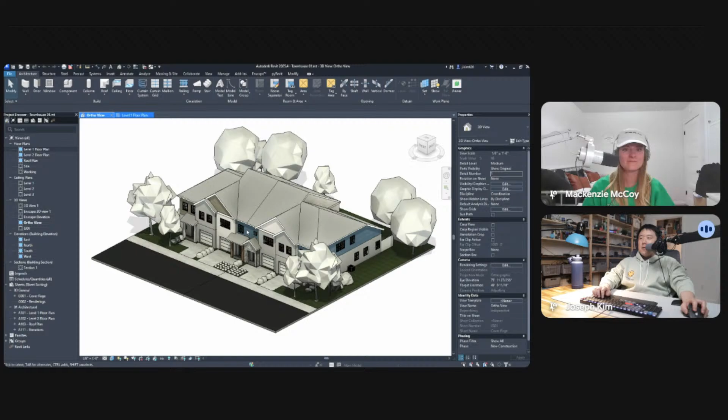So this is a representation of a simple residential townhouse model that I have put together. That's great. Yeah, this used to be my house, so I put it all together and came up with a more detailed plan. Often you want a living room like this, and mind you, these are Enscape assets, so they come in nicely. The Enscape library is a library that you can certainly use for placing these furnitures. But let's say you just don't have any of those available.

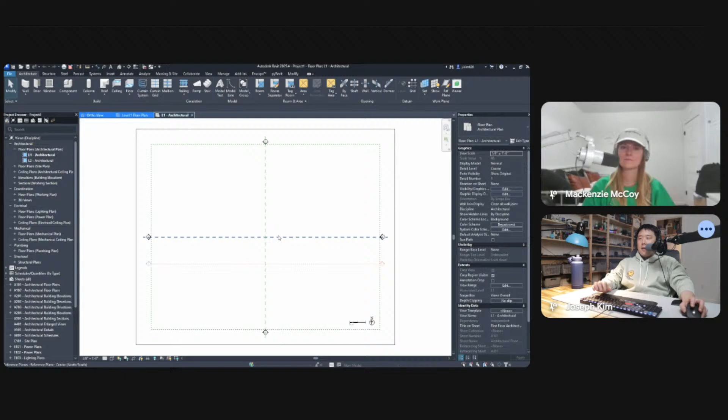You could find and use some assets like this off of the Autodesk families that come with it when you first start a project. So, for example, if you were to start a default project, it comes with some families in there. So here you can see, I believe for years they have had desks. Let me see. Yeah. They almost always have a toilet.

Yeah, it has some countertop. It has this default desk. How funny. Yeah, so you could put a desk, but inevitably you put in a desk that doesn't look like anything like what you intend it to be. So I don't know who uses this kind of desk anymore, but it's been years that the same type of desk, and also there are different kinds, and nobody's sure what's the difference between that one and that one.

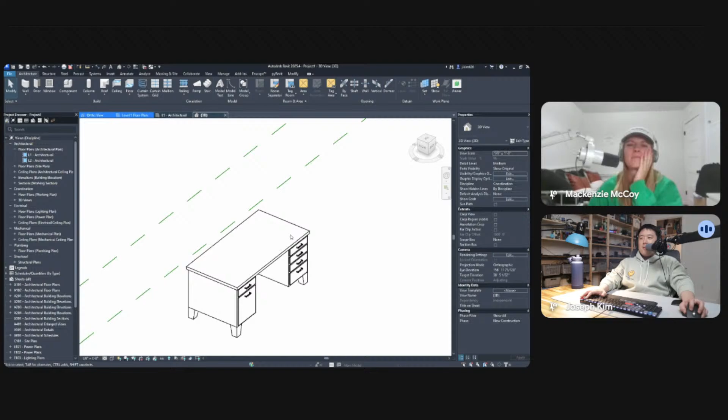I guess that's the size, but besides, what's the difference between this one versus this one? And there are some parametric data in there. Sometimes you can just look up the properties and see maybe the body, they look identical. So again, these are some of additional information that you don't need at all until you're really ironed out in terms of your specification and selection of your furnitures and such.

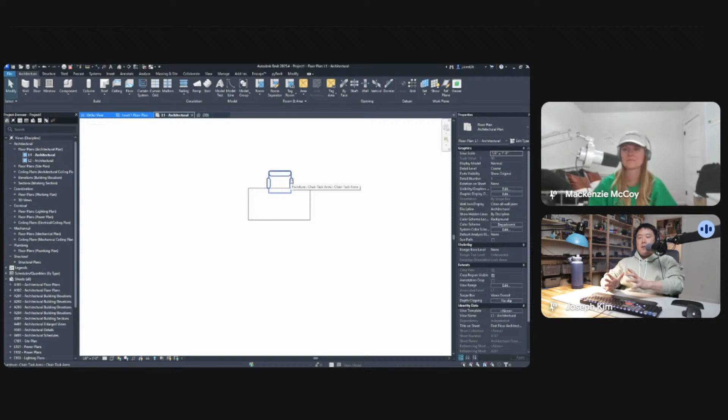And again, good luck finding other type of things that can go with it. There is a desk and a chair, I guess you can use for basic representation, but that's fine. But when you want to do living room table, dining table, or restaurant tables and chairs, those are not available as a default in Revit. Therefore, now you're going to have to go out on a hunt for finding something that is represented. Let's say we want a sofa.

Actually, maybe is there a sofa? No, no sofa. Chair. This armchair is all you get. So no restaurant chairs, no dining room chair kind of thing. Bar stools. So let's say I want a sofa here, and let's say I didn't have that, and also here's a countertop island that I put in, but I want dining table and chair set here.

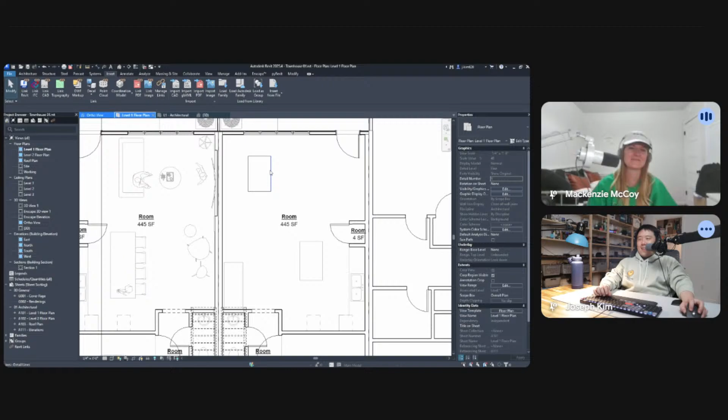Now I can go about finding a family that's somewhat like this, so that I can put it in there, or I'll go to a website like bimobjects.com or Revit City, those type of websites I can go and look for. Or I guess a lot of times what we end up doing is just putting a detail line, fill regions, and then now do a little nice thing and then group that so that I can repeat it somewhere.

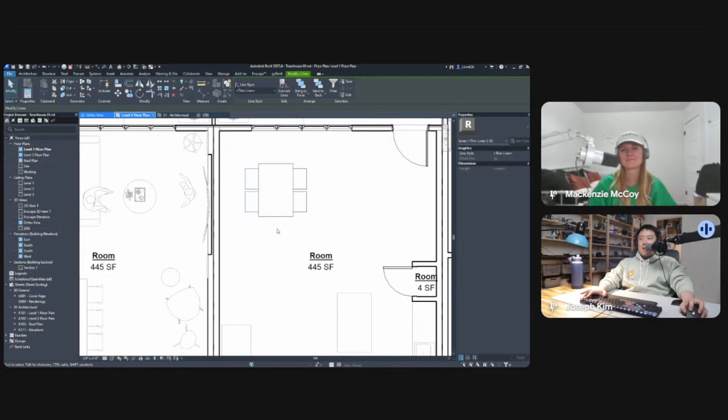And again, that's fine for that moment, but do you really want to? Yes, when time is at stake, you gotta do that kind of thing. And we've all been there and done that, and that's fine for sometimes. But sometimes you want to do a little more than this, or even for later rendering purposes, when you look at things in 3D, you want to make sure those are actually shown as some sort of a blob in your rendering. So bringing them into a 3D model would be somewhat useful too.

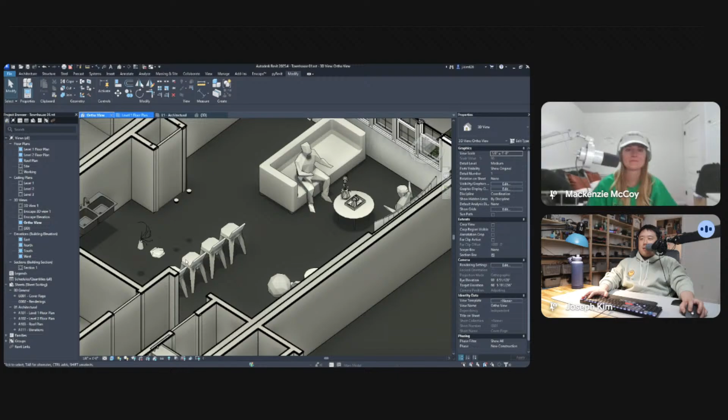So let me do a section box here, and then let me just show you what that looks like. Obviously, where I had placed, this is the second floor, so let me go further down in there. Ones that came from Enscape have somewhat of a representation. This countertop is gone, but the sofa and the person there is kind of there. But obviously, because I put detail lines, it's not there, and I won't be able to cut a section or elevation and expect that to show up on there. So, how do we kind of solve that problem?

As I have mentioned, we can go to the 3D Warehouse, 3dwarehouse.sketchup.com. You do not need a SketchUp license in order to utilize this. That's a good side, but you do need an account with SketchUp. You can make a free account, and you can still download. I think there might be some limitations in how many models you can download per given time. I'm not clear on where that limit is, but I've heard there may be a limit. I am a SketchUp license owner, I don't have that limit. So without research, I'm not able to tell you what is the limit.

But here we can go ahead and look for, let's say, sofa, for example. SketchUp does a pretty good job of presenting their verified type of content up here, and they do have a couple more parameters applied to them. So where they have these live tags, meaning they have variations, you can go ahead and configure that type of set to suit your needs. So you can tweak the height. That's cool. I don't know if this is all that necessary, but what I'm going for is a simple sofa set, or perhaps sectional armchair here, for example.

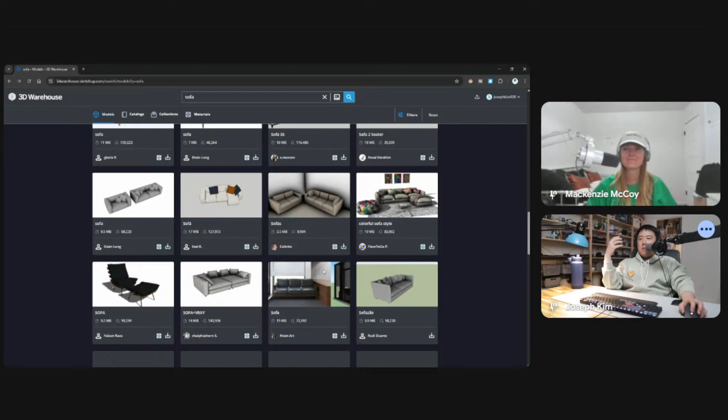But you can absolutely use other individual provided types of sofas or any furniture. There's just really a limitless amount of stuff here. You can search by popularity. Something that I do is I put a filter so that you limit things by file size as well, so that you don't end up importing something too heavy or an entire world, right, and something that is kind of simple enough.

Because honestly, for a sofa, 10 megabytes, do you really want all of that? Right? So you want something simple enough, a simple representation of what you're trying to do. Probably this type of thing will suffice. Even if it's a blobby thing, I would have accepted that too. Again, this is a very simplistic type of thing, very light. Those are the type of things that I would mainly look for. But often you can also go off of what SketchUp provides as kind of verified, or their own set of library, and download them.

A simplistic thing that you can do is, and it's kind of obvious that I haven't tried this and pre-run this ahead of time to verify which works the best. But you know, let me just be consistent and try to download something that somebody else could also download as well. So let me go ahead and pull this one up. And I don't have to edit this because, again, I can configure as I would like, because this is a live model, which you can just change a few things to make sure it's the size or type of sofa that you need.

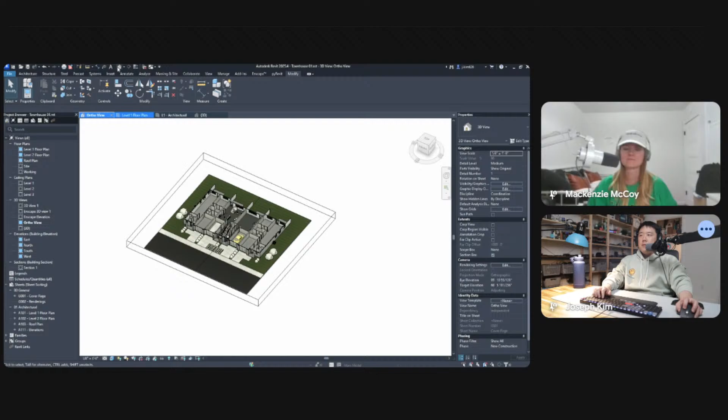But for the most simplistic type of workflow, we tested this last time when we were working with the Revit workflow, right? So when we were looking at this, how do we import? We went to Insert, and we learned that we can link CAD, just trying to refresh your memory here. So you can go ahead and pick the SketchUp file, and because of this version removal, going back to what we spoke about last week or the week before, you don't need to worry about versioning of SketchUp anymore. So you can either import CAD or link CAD. My preference is link CAD so that you can always go back and update.

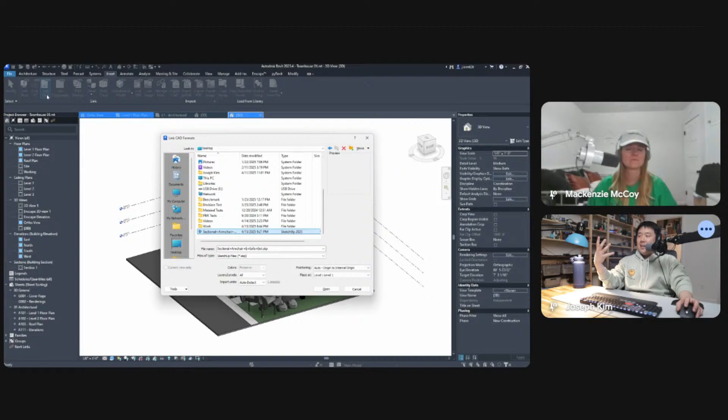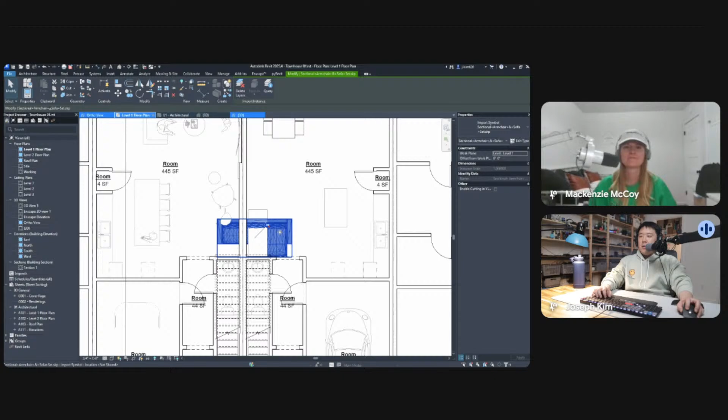That was the workflow that I have shown. So let's go ahead and link, and then I have opened it, and hopefully it showed up somewhere. Maybe it showed up somewhere in the middle of the plan. It did. Do you see it? Right by the stairs. Yep. So it came in, it's pinned, so I have to unpin it and move it around. So that sofa did come in.

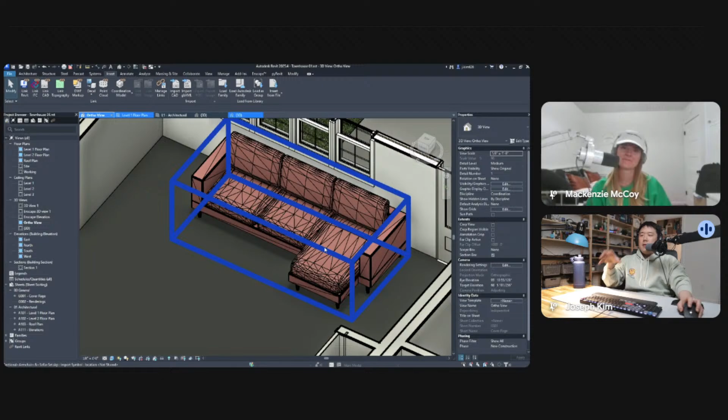Maybe let's put it there. So in the 3D ortho view that I had, it has come in even with the color, not necessarily the flowery texture on it, but it's still red. And the biggest downside when you bring things off of SketchUp, especially for some of these rounded things — for tables and chairs not as much, but for something like a sofa that is blobby, not rectangular, cushions — it may have triangulation or faceted faces going on. So those are the things to watch out for.

It's not as detrimental if you have one diagonal line going on, but on your plan this is not so pretty. There are a few ways to get around this, because you don't want to have linked CAD all over your model for all of these entourages that you intend to bring in. So instead of bringing it in as a linked CAD — I just did it for the purpose of demonstration here — I'm going to undo to where I didn't import that bit.

And then I'm going to start a new family, not a project. So family here, and here's my family browser. Because I'm in the United States, Imperial is what I'm going to use. For something like furniture, you can use furniture. My general preference is to use generic model because it is more widely accepted. It makes almost no difference, but generic model is a bit more flexible in that you have these pre-made templates that are face based, floor based, whereas furniture doesn't have that.

So try a few things out. My general recommendation is to use generic model so that you can always reference it later on, because then you can apply this concept to various types of things. For a lighting fixture like a chandelier or pendant light that you download off of 3D Warehouse, you probably want to put it in lighting fixture. So depending on what it is, you may want to put it in a different category, but generic model generally fits the purpose. So I'm going to go with the generic model without a specific host.

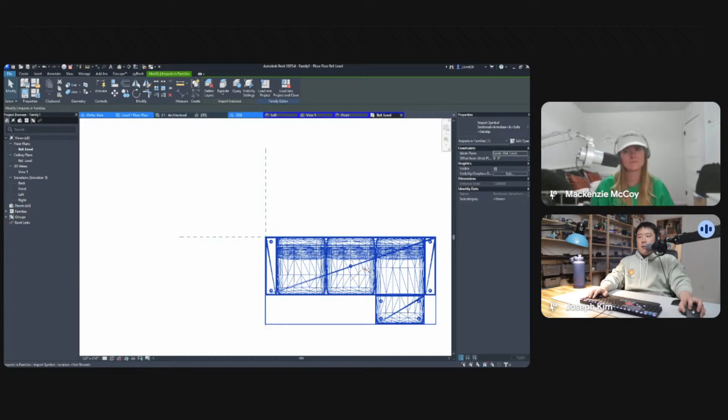So here I can go ahead and insert. Notice how there is no link CAD. This is just a Revit family thing; if you know Revit family making, you know this. You cannot link CAD into your family, you can only import. So let's import this. Once you bring it in, there's no link to the file, which doesn't matter because we're going to work off of Revit anyway. You find it and bring it in, and the origin for this family was in that corner, and it's going to be pinned. So we just have to move it to a spot that is more representative of what it's supposed to be.

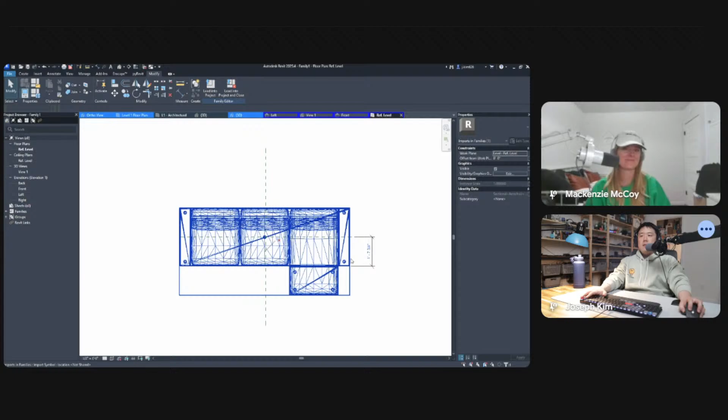You can actually put parameters on this because some model elements can be measured. Once you put a dimension, you can turn it into a parameter. For example, if you had multiple table and chair sets made as one family, you can have chairs at different distances, or for a wall hosted element like a TV, you can offset it a certain distance off the wall, or for a pendant light, you can control how far it comes down from the ceiling. There are additional parameters you can add because this 3D model object is referenceable. But right now we're just trying to find an easy way to put a representative model into Revit.

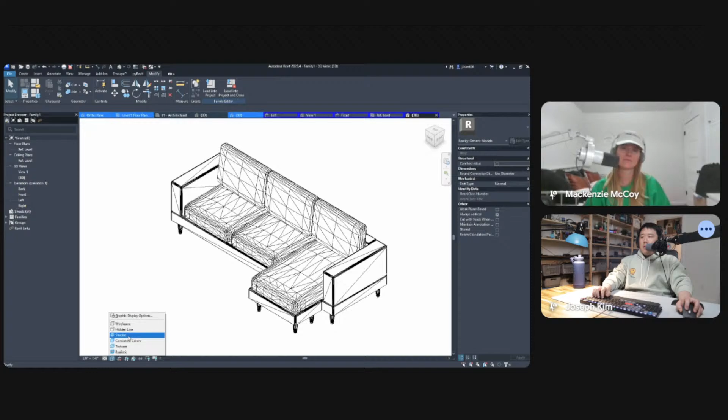So again, this shows up on 3D view. And if you don't show the inner lines inside the Revit project, those triangulations will not show up. But for plan purposes, you really don't want to show those types of things. So you can go here and not make it visible for your plan view, or change the visibility graphics so that it doesn't show up on your plan, and instead use a detail line on top of this, so that on your plan view it just has a rectangular representation.

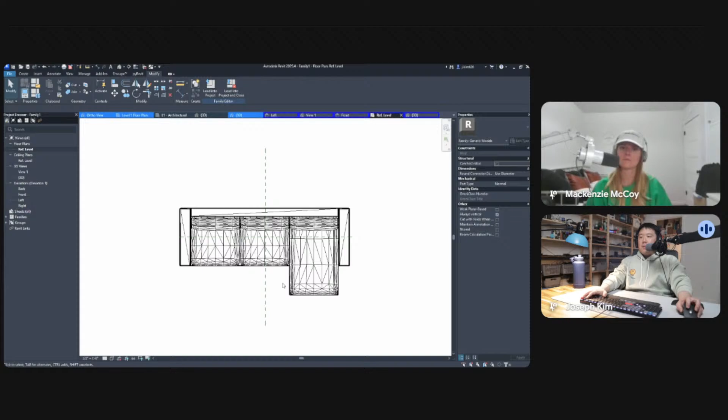So I can go ahead and create, then model line, and trace this out if I really wanted to make it look cleaner. And since it's sectional, let me go ahead and — what did I just do here? Model line there, and then create.

It's not accepting my shortcuts because I normally don't draw on Revit 2025, so my muscle memory is fighting against it.

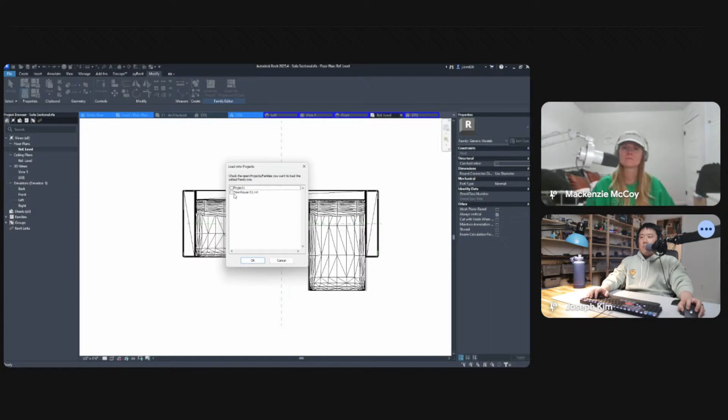So I have added the detail line in here. Now we just need to save this out. Let's save as family, and a dialog showed up here. Desktop, we're just going to call it sofa sectional. Perfect, and then save. Since we saved it, we can just put that into our main project there, and now it has shown up here.

So on plan view, it doesn't show triangulation because we masked it with a detail line. Slightly better than what we did previously. And then also on 3D view, this one, it doesn't show up because I made it not visible on the model part.

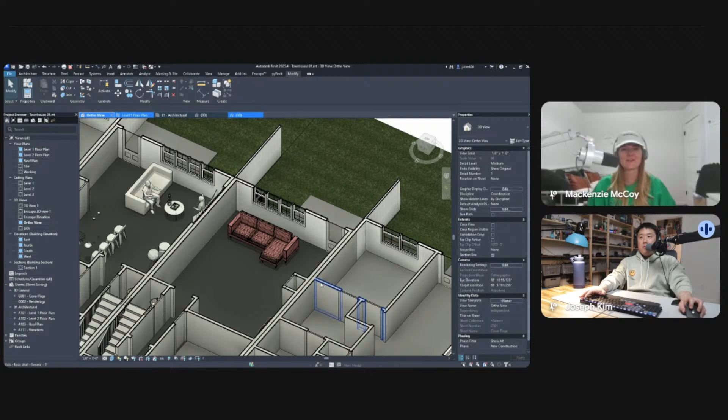So let's go ahead and edit the family, make sure this is visible, and then I'm just going to save it over, just like any other family that you use on Revit. Now it shows up on 3D, and then it shows up correctly on the plan view.

It will show up with triangulation on the side view, but you can also control that by double clicking in, and then you can control how it shows up on your front view or left view, that sort of thing, so it controls how they show up on section or elevation. So that way things are controlled.

If you want to be real fancy, you can have multiple SketchUp models in here so that certain things are turned on and off depending on the parameters that you put in. So it's really limitless, but you already have a good 3D representation of what you're trying to achieve.

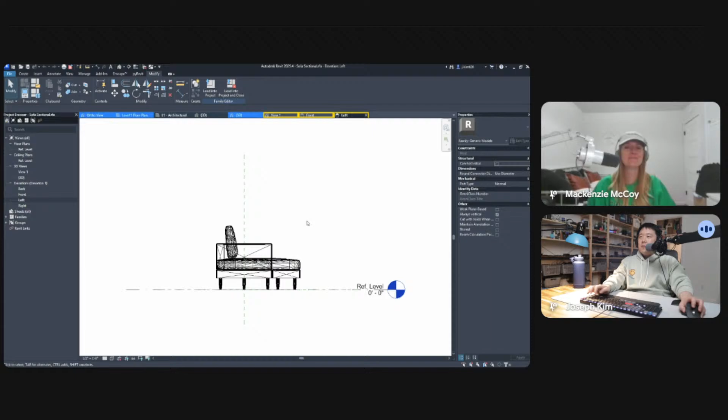Sofa might not have been the best example, again, because of the blobbiness of what it is. Let's go ahead and look for something simpler to use, like tables and chairs as an example. This was a good example though of seeing some of the difficulties on those cushions and how it can be tough to look at for a while or kind of heavy on the screen. Realistically, those are the challenges that you're going to face.

I'm going to mention this further later on because this can also be configured. So configurable ones tend to have higher storage count or the memory that it takes. Whereas this one is supposed to be really simple, right?

So let me go ahead and first download this, for example a dining chair. And then we're going to do, let's say, a table. Is there a dining set? Maybe a dining table, dining chair.

So you can configure it to multiple different kinds. I wonder if you can just configure the amount of chair count you need, like you have 4 chairs. I've actually never done this, so it's kind of cool. Let's see, what are the parameters? Height, can I set the amount of chairs? Yeah, number of chairs along width. Okay, I want 2.

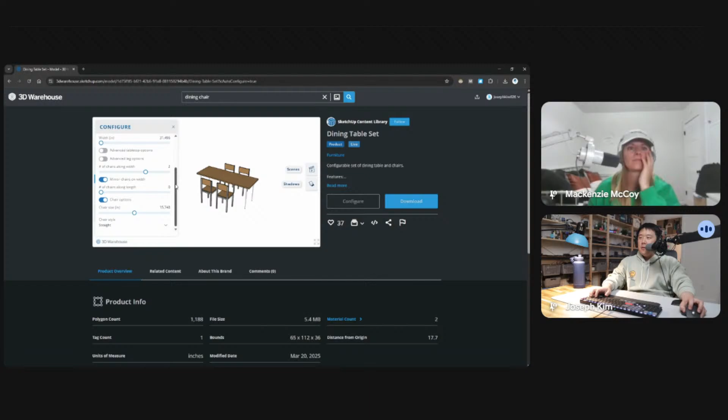And so then you change the table width afterwards, along the length I want... can I do that? Oh cool, yep, and then I can change the length, shorten it.

Okay, here's like a typical restaurant table and chair set, right? So I configured it, I'm going to download it. Dining table set, okay, good place to start.

All right, so we're going to go to the Revit side, forget this sofa set we made, I'm going to close that. I'm going to start a new family. For the sake of argument, why don't we do it off of furniture? I think furniture will be the most appropriate thing to use.

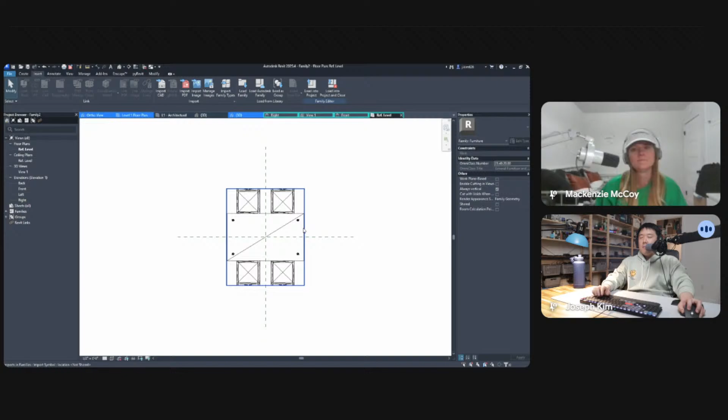Was this the one? Dining table set? Okay, so here, much less triangulation, but triangulation is still happening, and I'm going to touch on that a little later. But I really like the fact that it came in using the same origin so that we can just place it in the center.

And again, if you really want, on the floor plan view you can just mask it with a rectangle and turn this off on the plan and all of these views so that it doesn't show up incorrectly on your view. And again, you can also control it by detail level, which is kind of a benefit. So for coarse level, you just show the detail lines only, and then on medium or fine, you actually show the model so that you control that sort of visibility on your model, and you can filter that on your project side as well.

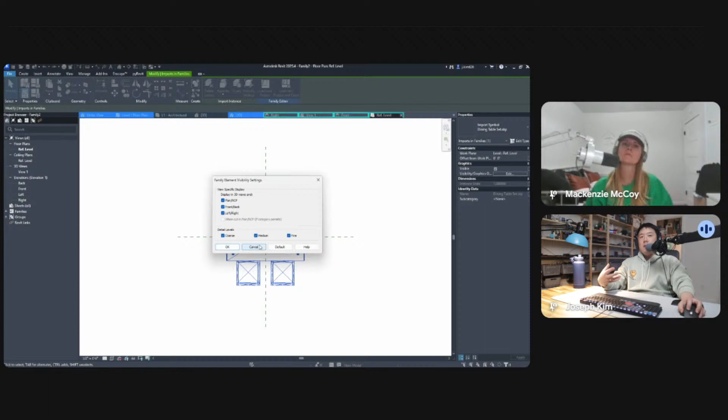That's cool, the details of control it gives you, since you're in the Revit family realm. But for this purpose, let's go ahead and save, though I don't want to get this family away, so I'm just trying to save this out.

Let's save as family, and I'm just going to call it dining table set. Save. All right, let's put it into the townhome project. Now it brings it in great, just like that. I didn't have to look hard.

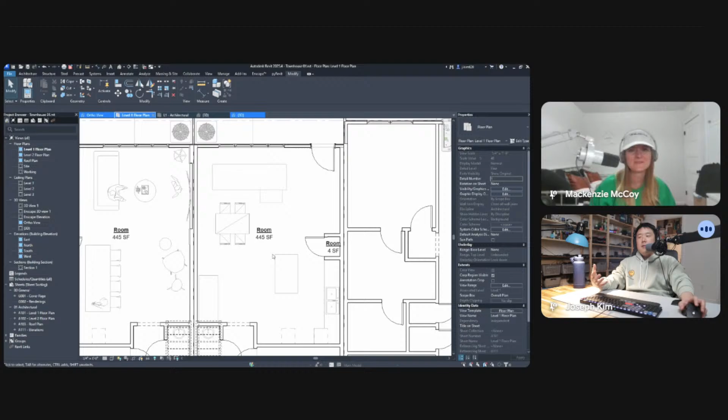And it didn't have all the unnecessary information, like a website link or model name. That's all going to schedule into my schedule that I'm going to put in, no other junk, just a clean thing that came up. Again, you can go into the family and clean things up.

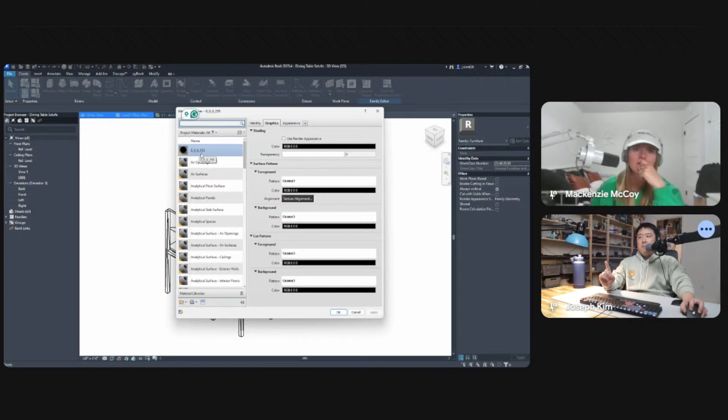So in the object styles—sorry, I mean the materials dialog—there are some additional materials that came in because this is a third-party material that's coming in. You can purge those things and they will go away.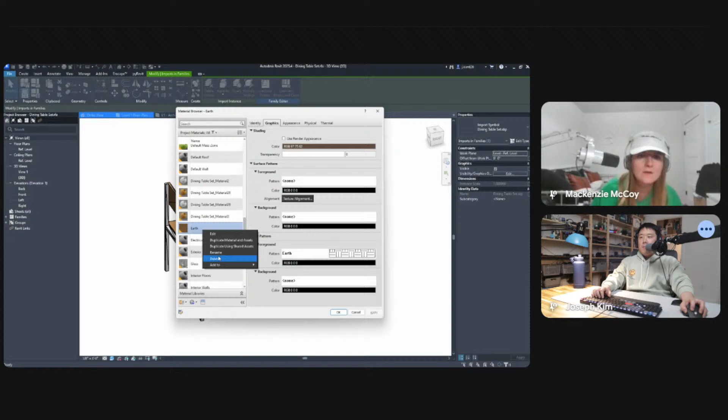For example, if this was a shaded thing, that brown color is showing up from the model you've imported. Let's actually find which one that is. It might have been like the earth—earth feels a little weird. Dining table material, there it is. I could clean that up if I really wanted to, so it doesn't show up on your model.

So a bit further purging or tweaking is possible just on the Revit side, because notice I haven't opened up SketchUp at all—I didn't need a license for it. If you just need entourage or furniture, you can use this workflow.

Before I move on too far, I also wanted to check the visibility graphics. It's already in there, so let's go to the ortho view. And why is that table not showing up on my ortho view? Do you have any idea?

Did you turn it off? In here? No, or is my furniture off? Yes. Yeah.

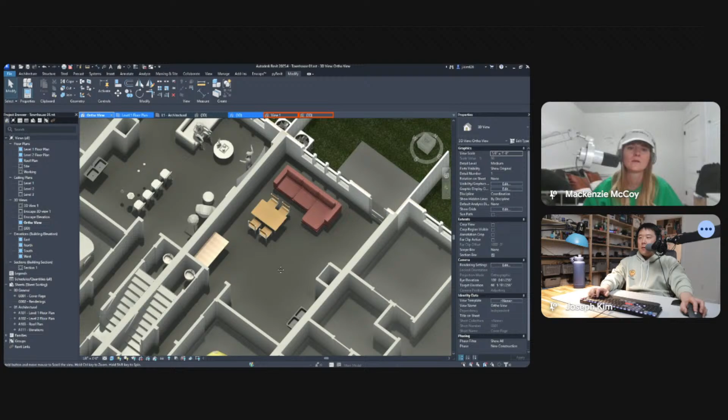Okay, so that furniture is showing up. But if you're bothered by this triangulation line, I believe you can turn off Show Edges, and then that triangulation could go away on your 3D view. Again, I kind of like seeing the edges—I'm kind of a stickler for that, you've heard me say it before, so I wouldn't want to remove it.

But if you just need to get things done and needed some representation, it was really simple to do this, whereas it would have been a lot harder to find something from other websites, or you do have Load Autodesk Family—have you used this before? No, I have not, I don't think so.

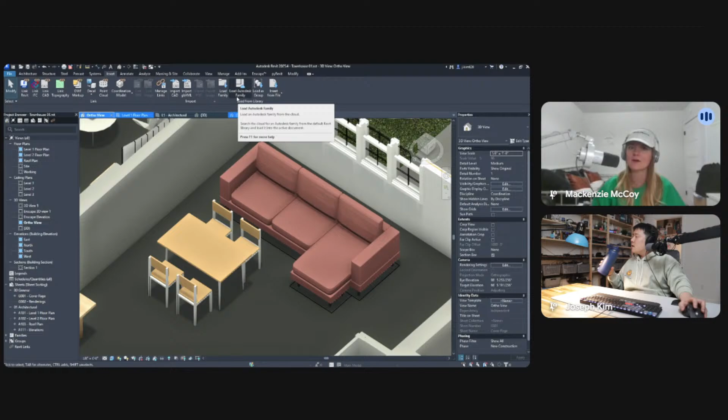Although this isn't the perfect library, sometimes you can find things in here that are okay to use. I have no idea why this is all going wonky—chair. Oh, not a lot of chairs, but you could use some of this. They're relatively clean and don't have manufacturer junk or too many extra parameters. But 'elliptical chair' is cracking me up.

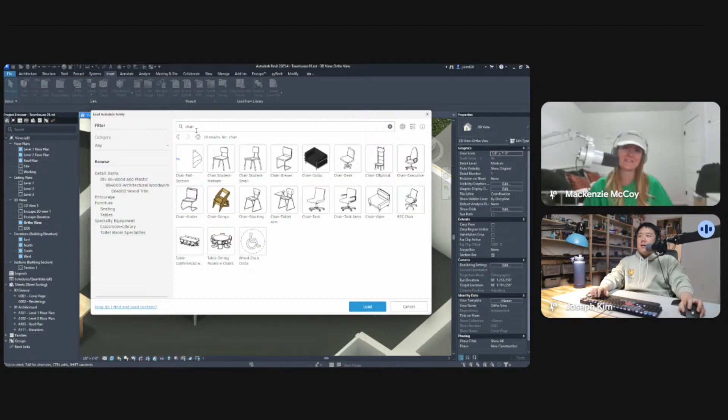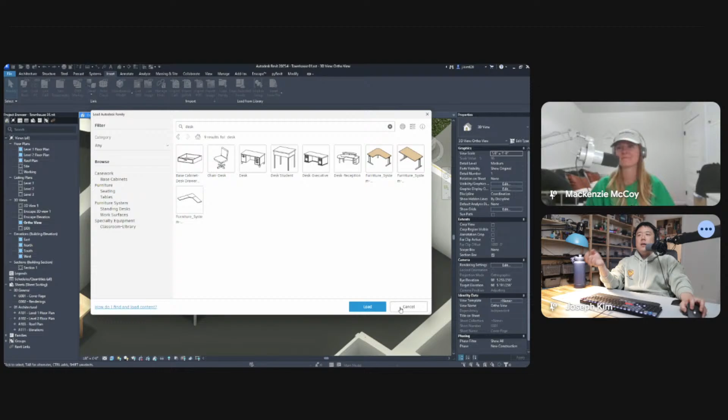Yeah, but they have a limited selection, let's put it that way. And desk—you could use this, and the desk you were finding was a variant in here. Sometimes those may just be good enough, but things are a bit more available on the 3D Warehouse side, and they may look just as good on your 3D views. So that's what I wanted to say.

Now, if you own a SketchUp license and can open that up, even as a web version, there are a few more things you can do on top of what we were able to achieve relatively quickly. So let's go back in here first of all.

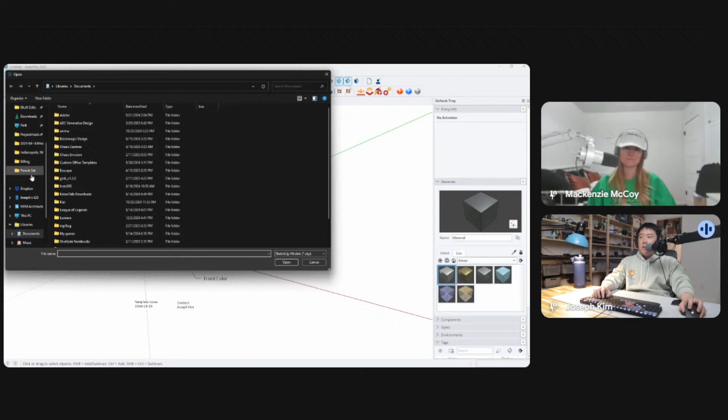Since this is all imported, we have to re-import after we've edited on the SketchUp side. Let's go ahead and open up my SketchUp, and I'm just going to open up that model that we had saved—here, I'm just going to open up this one.

One thing I do want to mention is, why are we seeing—this is a question to you—why are we seeing triangulation here when you don't see triangulation there? What would be your first guess?

Sorry for putting you on the spot, but I want other people to think about it a little bit too. No, and that was you clicked it, and I was like, wait, where's the line?

Yeah, because this one is not blobby, right? So far I get it. But this one, no, why? Yeah, because the only thing I see are the legs that are rounded. Is there an issue with the face that we're not seeing? Is it underneath or something like that?

So I just unhid all the hidden lines. Why do the hidden lines have a little triangle? Because this is the configurable live model, it needs to be able to stretch. So I think SketchUp is putting the triangles on.

So that means if you were to go find something really, really simple from other people that's not configurable or a live SketchUp model, that are configurable, you should not see that type of triangulation. For example, I'm going to guess that this is not going to have triangulation because it's a really simplistic thing that is not blobby. Again, we could change this.

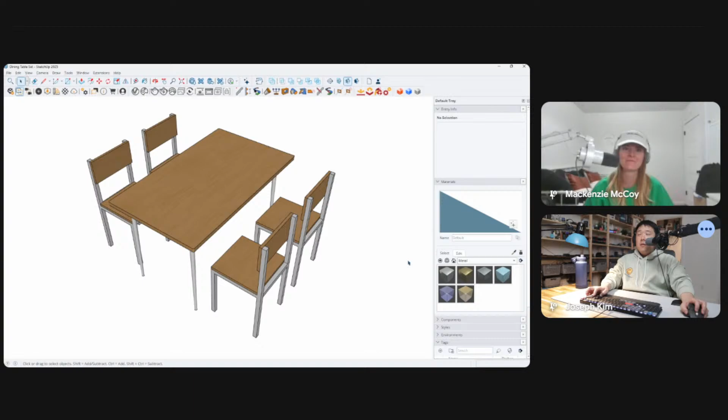So we've done a bunch of extensions, SketchUp tips and tricks. I probably did mention, I can't recall whether I did or not, but under cleanup, there is merge faces. I have the shortcut of Shift W if you follow along on some of the shows I have done before.

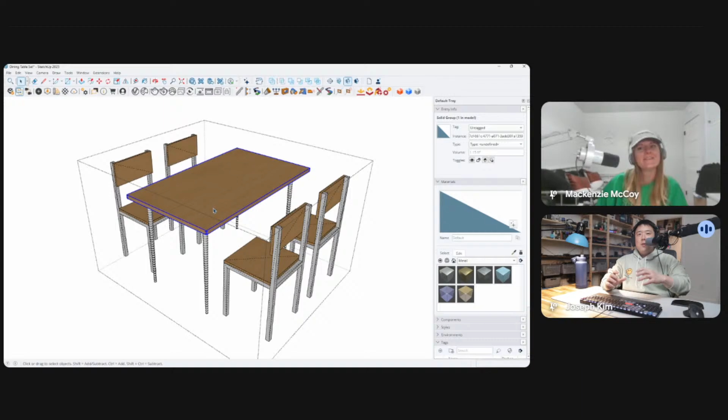If you do merge faces, and I'm going to do this in quick succession, I'm going to select this bit, the top panel of this, and then do cleanup. I would use the shortcut, but for visual representation I'm just clicking it. And you see how that triangle just went away? So wherever it's possible to merge the face and remove the triangle, it is going to do that.

I'm going to do that from outside and then run the same thing, which is Shift W on my custom shortcut. If I do that, it just simply wipes it away. And also I'm going to run a purge tool, which is Shift 0 on my custom shortcut, and get rid of any other materials or things that I am not currently using.

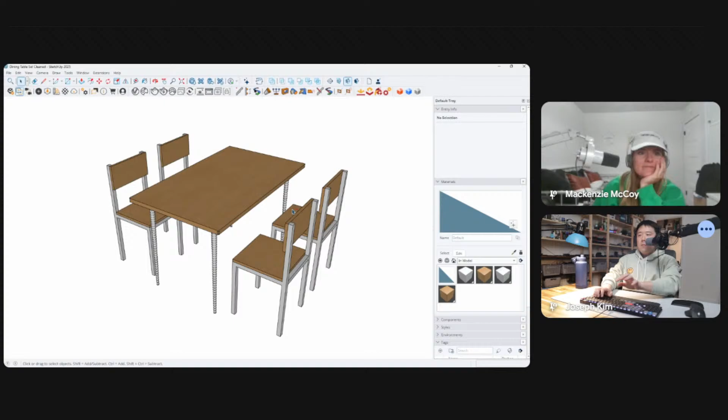So here are simple four materials that are coming in here, and that's all I have. From here, let's see if it reduces the file size. Okay, so this is cleaned. Let's see what it says on the size. So this one is cleaned.

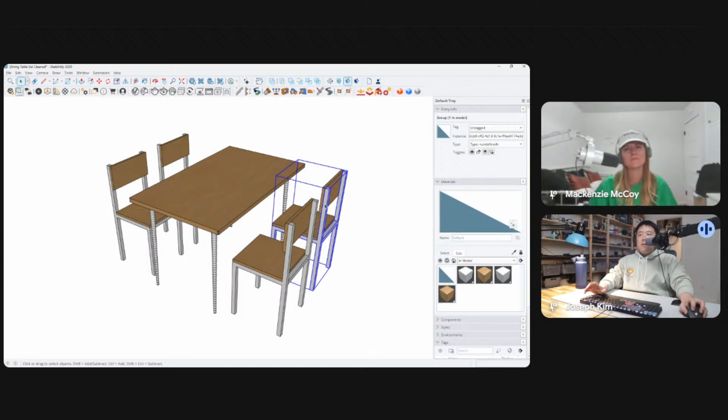Still 5 meg. I'm not sure why that is so high. My guess is that because this is a live component, there are some aspects to this that are adding on to the component count. So that's something for me to figure out later on. But yeah, my guess is that if this was not the live component, then it should have been a lot less than what we got, because it really isn't much geometry here.

I wonder, though, if I were to start a new file and put this in here, if that's going to be that high again. And I'm going to try to use the same origin. Here's a little tip: hit K once if you can't see the origin, and then go here, and it'll just snap right there.

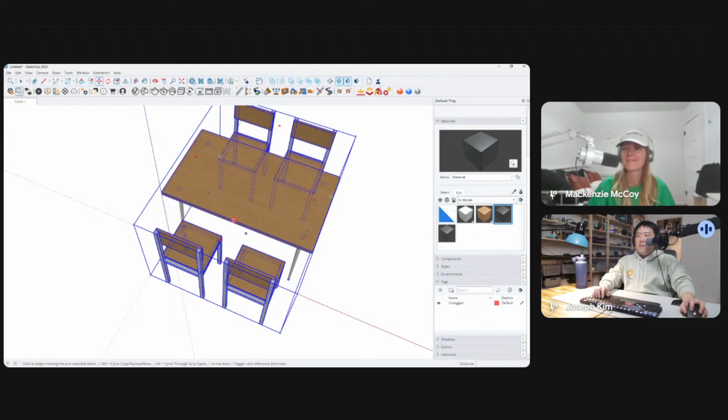Just picking up SketchUp tricks on what was meant to be a Revit session. Here, so that one there, I don't know what I just did there.

Here, and then because I have K enabled, I can snap on that origin. So everything is arranged and centered, and then I'm going to save this over. So I did save as, which is Control Shift S, custom shortcut. My muscle memory. And then let's see how big that is.

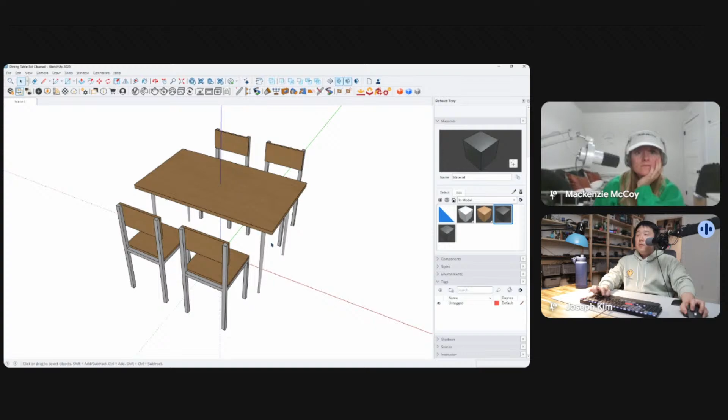Had I closed it? All right, desktop for you. Still 3 megs, but that went smaller, that went down. Not sure where though. I wonder if it's a material that is really big. The image sometimes can be kind of big.

That would make sense. How about this one, does it have mapping on it? No, it doesn't. Okay, we only got two materials.

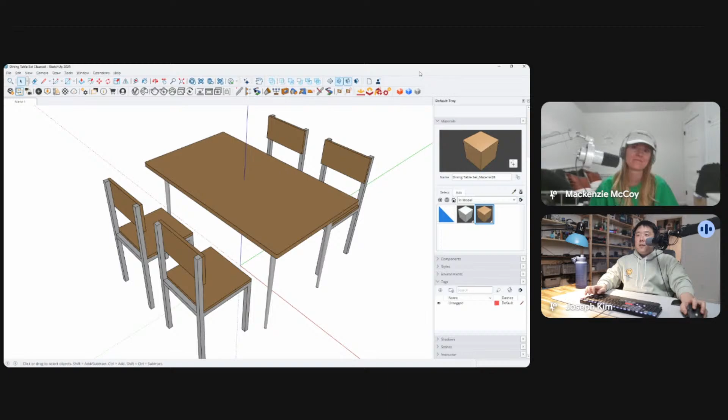Purge once more and save over it. And would that be big? Oh, it's smaller. All right, 2 meg. We were able to get it down. You did. Yeah, nicely done. So maybe I can study further how to bring that down even further and strip it out. But that's how much we were able to get down to.

And then let's go back to the Revit side and replace this guy. Yep. Delete it after unpinning it. And then insert. We're going to import the desktop side.

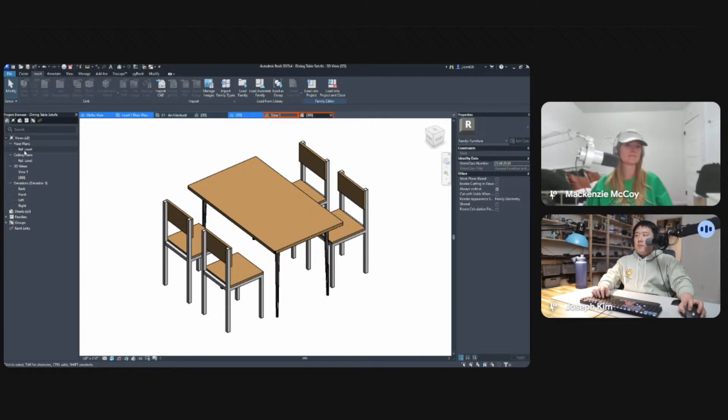Clean. So we brought this in the exact same spot as we intended. Maybe we need to clean this bit up, or, I'm wondering, is that gonna show up? No, it's not gonna show. So that is a good representation. It's pretty clean. Anyone can tell this is a chair, and anyone can tell this is sort of the table set.

And then I just need to update that on my file. I don't need to save over it, but it is going to replace. And you can see how it just cleaned everything up there. Yeah, that's so nice. And then let's do a little section there to kind of show off, right? View section, and we're gonna do a little section in here. We need to flip it. So flip it over.

Oh, no, that's not how you do it. At the top. At the top, sorry. Yep. No, you're good. Yeah, little brain freeze right there. Uh-huh. Things that you do all the time that just all of a sudden you can't remember.

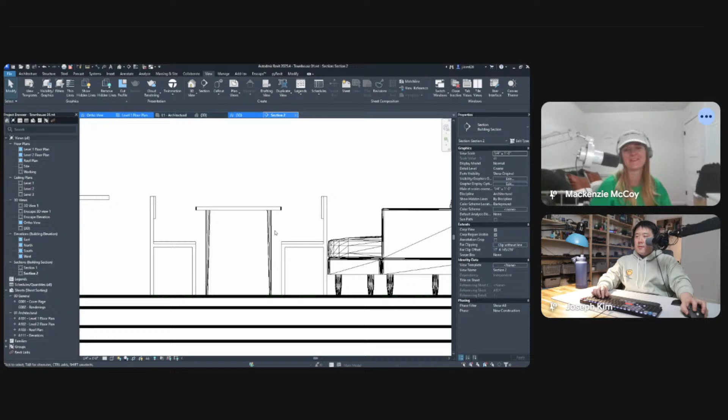Yeah, so here again the legs were somewhat rounded, but at least the other bits are exactly as they should be. That's great. And again, because these are generally snapped onto surfaces and reference planes, it is going to be able to do that. And then as default, the furnitures have the elevation from level parameter. So if you have a mezzanine or a little step over your floor, then you can type in some number, and it should be able to go up and down. So these are default parameters that you are able to use because everything came in as a native Revit element.

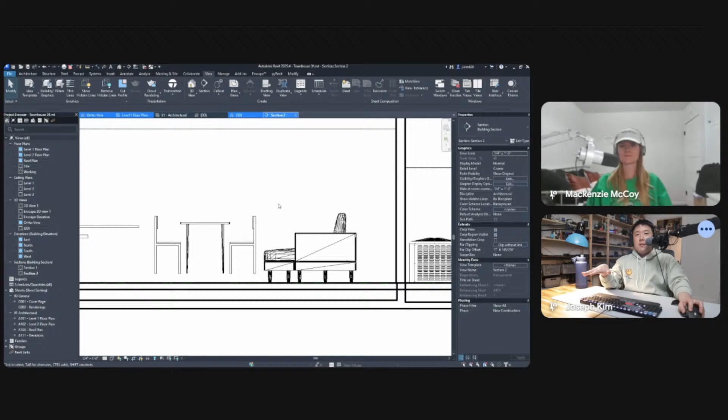So in renderings, it'll show up correctly because it has this. Again, it's not going to have reflection, no fancy material, but in 3D representation, you are going to be able to do this. And so another beauty of this, let's do lighting. I think that's something that I struggle a lot with in a lot of Revit models, finding lighting. Yeah. It's tough. Do you want to do sconce or pendant? Which one do you struggle the most with? I would say pendant. Okay, pendant. So let's do it. Yeah, because I think the varying heights that it could be, and the light source.

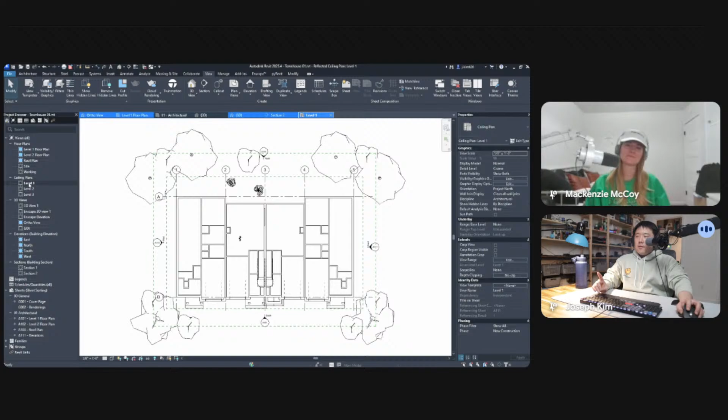All right, yeah. I actually did a pendant light import session way before. I made a video about this on my channel way before, when this versioning still existed. So you had to back save and do all of these jumps to do that. But at one point, this was SketchUp brought-in light. So I actually brought this in and did a pendant here. And I configured this one. This bit is from SketchUp, and I modeled something on top of this as a lighting fixture.

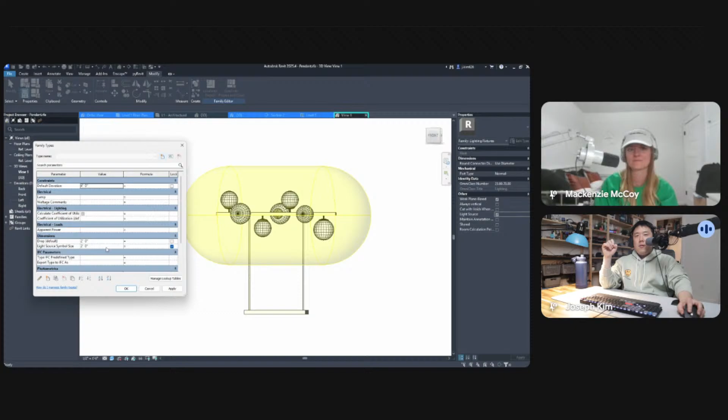That's brilliant, actually. Something important here is you want to have a light source for your rendering purposes. So seeing and being able to locate a lighting source based on the family is really, really important so that your rendering shows up correctly. And that is all possible. And I even added the parameters so that you have this drop length that goes on it.

For some of you out there, lighting sources, especially pendants, it's better to model them face hosted rather than ceiling hosted, because you will run into cases where you don't have ceilings and you're trying to hang it off of a floor or a roof or something like that that is not a ceiling. So you're 100% better off hosting off of just a face or a level or a reference plane. I learned it the hard way. Anyways, that's why the whole thing is upside down.

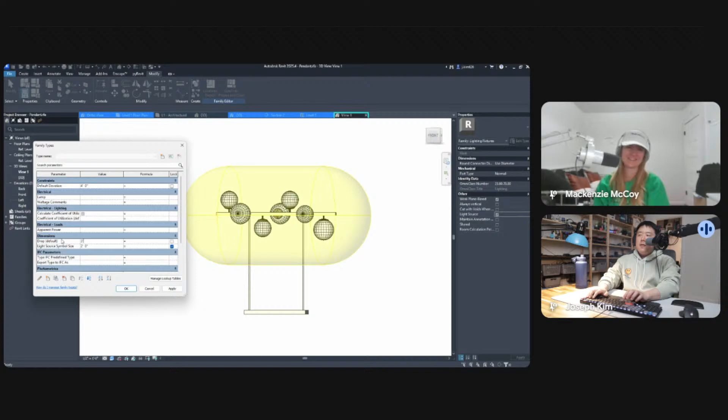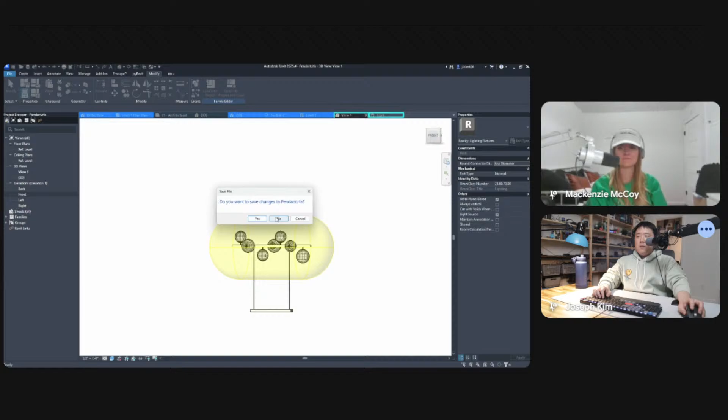Anyways, you can set different drop lengths, and then that will change accordingly. Unfortunately, I did not set this one correctly, so that it is also changing the lighting source along with it, but I can lock it. So once I lock that, let's go back to this view here. So as I change the parameter here back to 2 feet, it's gonna drop less. Sorry, it's upside down, but it will hit the lighting source in the correct spot. So I can bring that back into my project, and then it will have the lighting instance shown in there.

That's awesome. Lighting fixture, and then lighting source. If I were to show that, it's gonna be in there so that it is able to render away. Now, how did I do that? So I'm not gonna go into the details of the drop length and all of that, but I just wanted to demonstrate the fact that you can actually assign parameters to it that are workable, such as drop

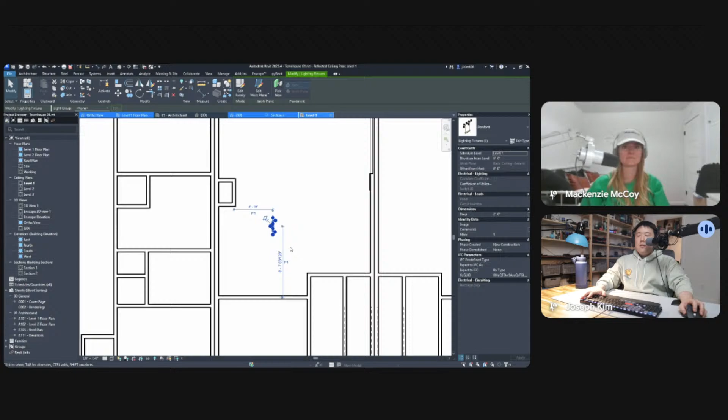length for a pendant. But because this is hosted on the ceiling, or sorry, hosted on a face, you are able to put this on different places and it behaves just like how a Revit family should. That's so awesome. And also, because it's face based, am I testing this too far? Yeah, so you can host it off of a wall as well. Oh my gosh, that's awesome.

So I'm saying yes, it is more flexible. So you can have sconces, for example, and have them basically show up on your walls throughout your project. I just wanted to demonstrate that quickly. That's actually really smart. Yeah, so you could do that. Thank you. I was hunting for that.

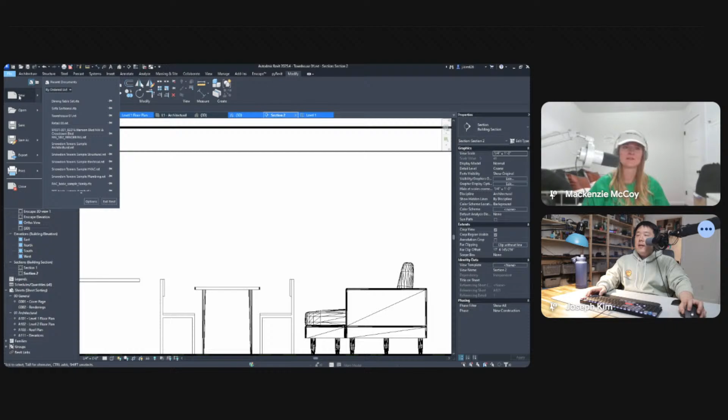Families, and then we're gonna do lighting fixture. Did they fix this? They only have wall based and ceiling based. That's a big problem. So I would just start with lighting fixture type here, and then let's go ahead and download something simple. I don't know, off of the whim here. I like that one.

Is it a picture? Good thing SketchUp is able to show you. Sometimes people have the face-me kind of thing, and oh, it's not a picture. Okay, good. That's a totally valid thing. So we tested it and we looked around. We're just gonna download that. How big was this? Oh, it's relatively small too. Okay, good. And then here, import the CAD.

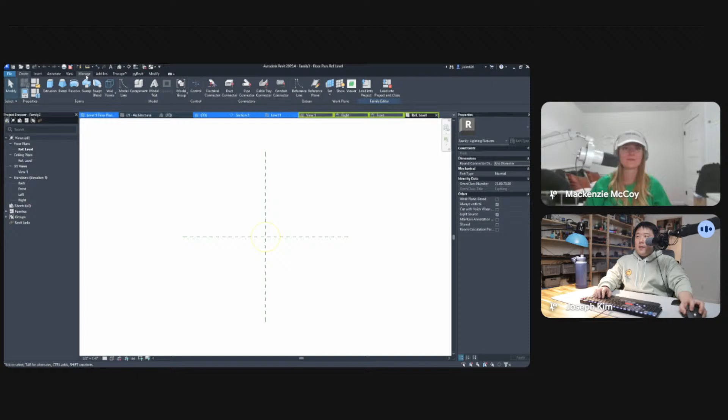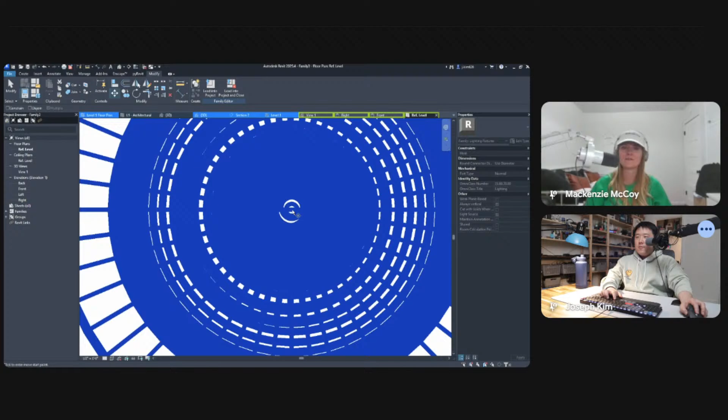And then, was this pendant? So you didn't save anything new today. Okay, all right. And then that came in right there. So let's go ahead and move it. Ooh, a lot of things going on here. I'm just going to put it in the center. And then I need to snap this. Let's see if it will pick that up. Yep, it is able. And then I can lock that. So let's see how this behaves.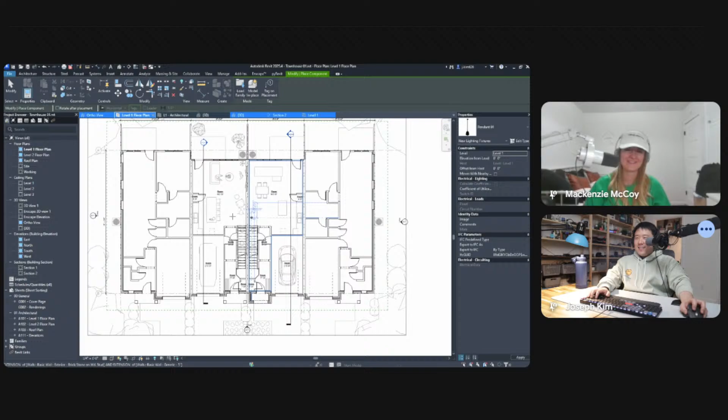Save this so that we have a reasonable name. Pendant. And then we're going to go ahead and import into this view. Oh, that's not good. New name, because I already had pendant. It's obvious that I haven't thought of this. Small pendant. Perfect. Okay. And I want to put it in the reflected ceiling plan. And of course, it's not going to show up for whatever reason. Level 1, because you don't have it. Level 2, no.

And the battle for finding out where I put this darn thing begins. Because they're not ceiling mounted. Yeah, is that what it is? Okay. Also, one thing that I forgot is work plane based. You want to check that. Got it. And then it will go to, hopefully, okay, we're gonna find out. Oh, that went away. Are you here? Yeah, you are here. All right.

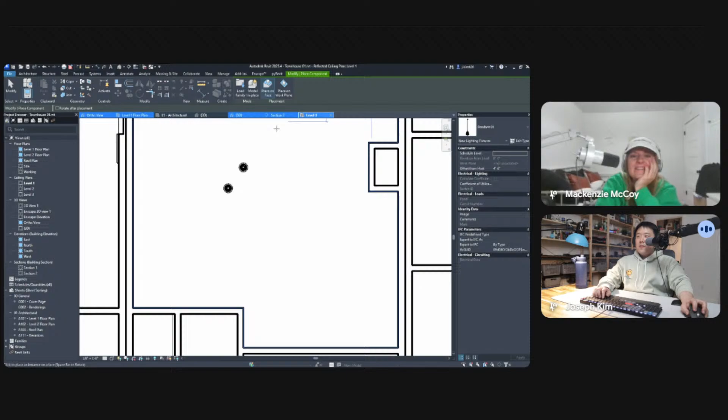So this one, place on face, and that won't show up. Huh. I don't like that. Where'd it go? Revit does this always. When is it ever simple? I will probably find it in some random places, as always. Elevation from level 0. Okay, that just goes to the floor. Again, that's because this was not made face hosted, but rather it's using this as a floor.

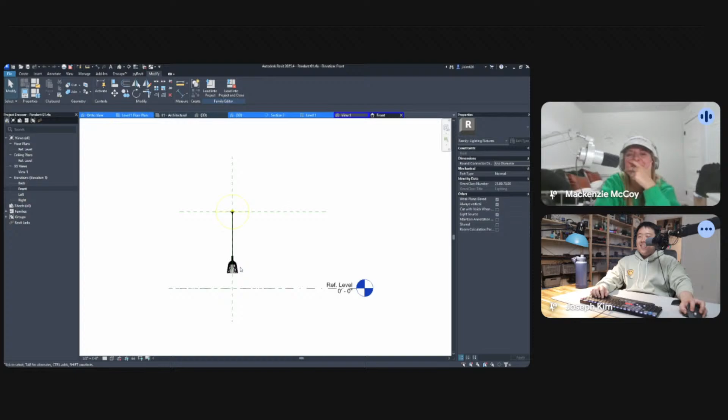Oh. So it's probably doing it, so I have to do it the opposite way. And the way I made it was that this base was on the floor, right? And then the pendant would extend to whatever length I decide later on. But we have to kind of do it the opposite way for the sake of time. So we can set this one to, let's say, 10 feet.

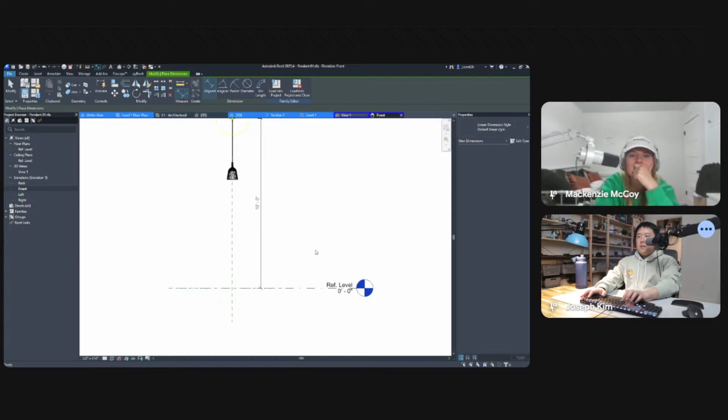I forget what the overall is, let's measure this. It's 8 feet. What is this? Ceiling. Okay, 8 feet. So I just need to have 8 feet. So here, change that to 8 feet. Perfect. I wouldn't necessarily do that all the time, but for this demonstration, yeah. So that has been put in. Awesome.

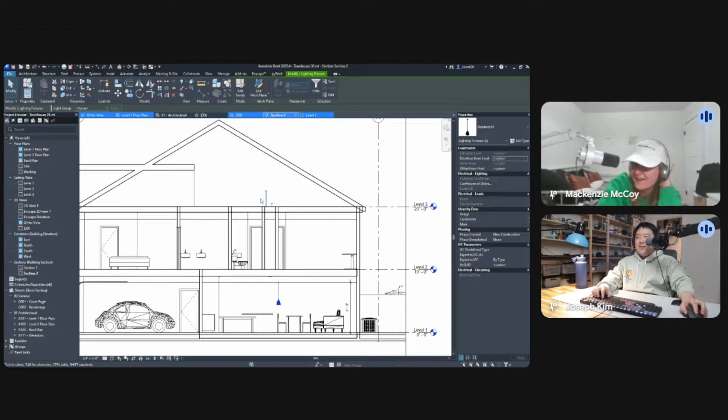Let's select every single thing that I had. This is a little trick again for Revit. The ones that I accidentally embedded into a different floor, I just select all of that, unselect this one that I want to keep, hit delete. That way I only have one instance of that. Can you show us the RCP? Yes. So this one. Perfect.

Create similar work plane. Okay. There. Look at all of them. Yeah, did it show up on the correct spot? Yeah, it did. Nice. So because this is hosted there, you can just kind of snap it in place and they all kind of show up like that.

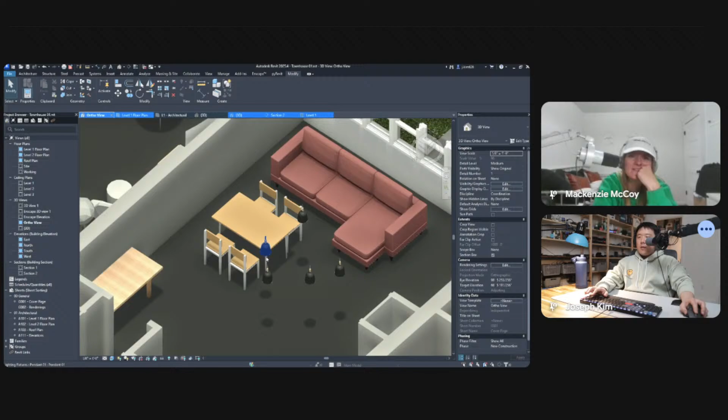That's great. I mean, this is probably not the best shot for seeing floating pendants, but that's what you can do. And frankly, they will show up on your rendering side as well. Yeah. That's awesome. It's good to know how quick it can be, you know?

Yeah, and if it's a wall hosted element, like a picture frame or a lighting fixture that's wall hosted, you can just move it against the wall, drag it around the wall, and it's just going to place and snap onto the wall rather than being floaty. So all of those parameters are available.

And again, you can go ahead and fix the materiality. If you want to make it a bit more simple by opening it up on the SketchUp side, you can do that. If you want to add a bit more flair so that the cone is slightly bigger, you can do that on the SketchUp side as well. That's great. Even if you don't have a full SketchUp license, you can still change a lot of aspects on just the web version as well.

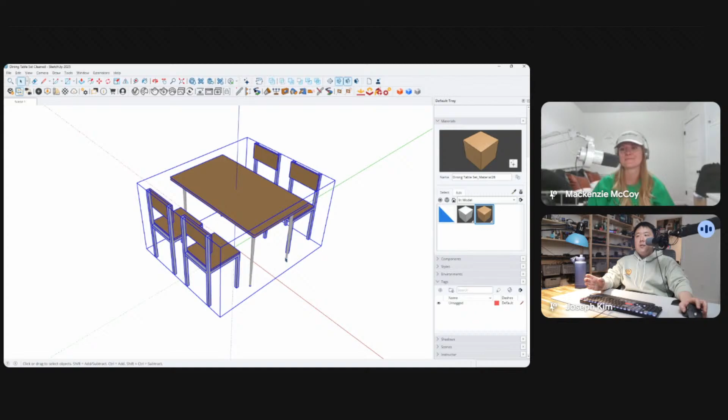So for something like that, even if you're on the web version, you don't need fancy extensions to be able to go here, select the bottom end of that, use the scale tool and just stretch from center. Perfect. You can get the job done on the fly to make it into what you want, or at least like what you're expecting. Exactly.

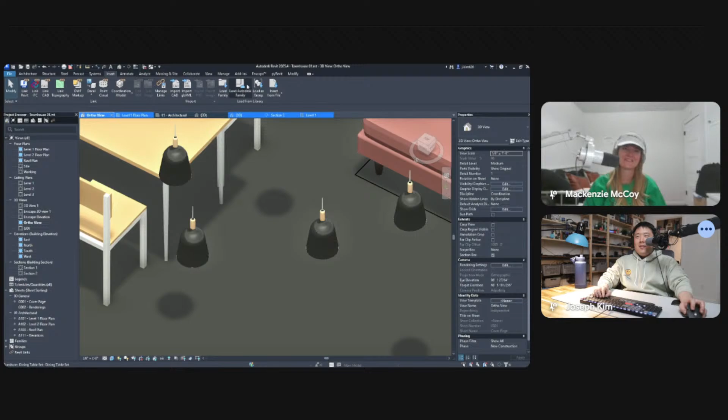Which will be a lot more difficult on the Revit side, because if you were to try to do this in Revit, there's a lot more thought and time that you need to spend in order to be able to do this. And good luck finding something that is adequate. I don't know, I've never done this. Maybe there is a perfect one. I don't know what I'm looking at here, but hopefully you can find something. Last time I went through all of this, I could not find what I was looking for.

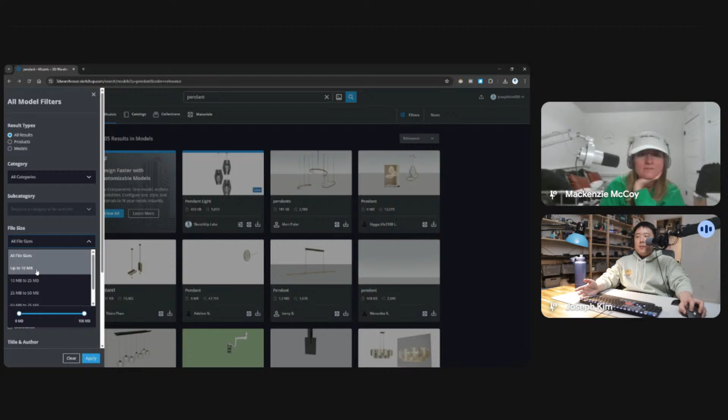So it's a lot better that you can just look at it in a different view. If that isn't the one, then you can back out, look for all of these things and put different filters to find out which one is the most efficient size. And yeah, there really are a lot of things you can look for in here. So 3D Warehouse, quickly. It is a little bit laborious for you to convert all of this into a family.

But once you've done something similar that is usable, then you can repeat that by literally dragging it into your project file. If it is on your desktop as a family or in a folder, you can just drag and drop that into your project and place it in there. So having an organized folder of tables and chairs, since you know you're going to use them again, you just save them out somewhere and drag and drop. That's definitely something you want to utilize. Make your life easy.

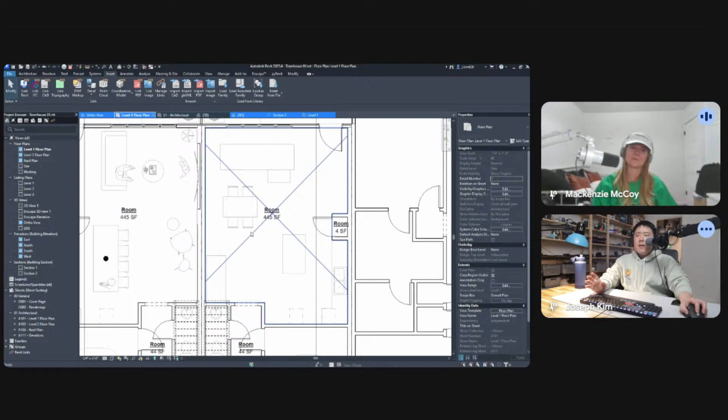Yeah, if you want to further it by making sure your elevation view is a better representation without the triangulation on the legs, you can do that. It's just a matter of spending a little more time to mask that element out. Maybe there's a smart AI later on that can do that automatically, but I don't have that ability just yet. But yeah, you can clean things up if you would like to. You can set additional instance parameters in addition to the 3D representation that you bring from SketchUp.

And because we lack a good, simple library on the Revit side, you can utilize the vast world of assets on 3D Warehouse. And again, spend some time on here. They've got some fancy stuff as well. You can search for content. You can actually do picture search as well.

That's pretty cool. So the other day I was looking for, what was it, a Herman Miller chair, and they've got some fancy chairs, right? So you can search for images. This is like, I think, 1,300. Oh no, $2,000 or 1,900.

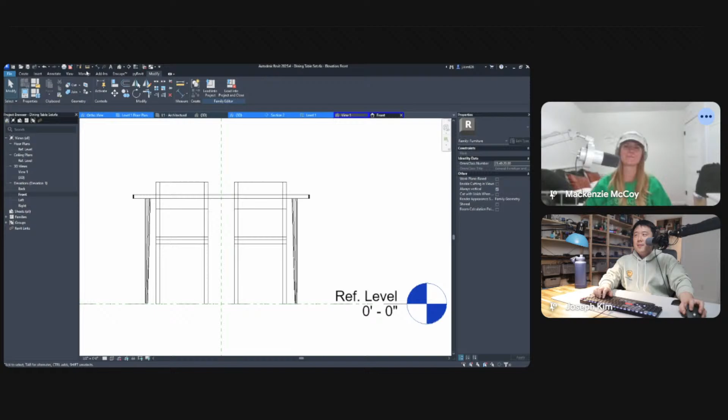Look at that, this is just 2 meg. It's probably gonna be a very triangulated blob, but you can go ahead and import that if you'd like to. Entertain me here. Yeah, there's a triangulated blob. I knew that, but that one comes in. Let's take that one out. Delete. And you're my new dining table set. Probably costs as much.

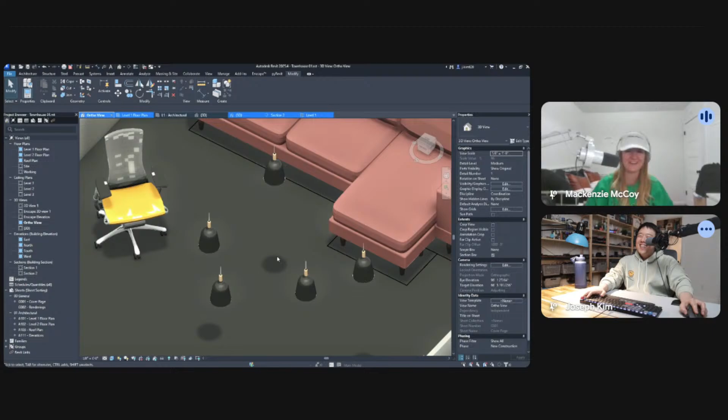There you go, perfect. You can either have a dining table or a Herman Miller chair. Which one is it gonna be? But yeah, those are fancy kinds of ways to search on 3D Warehouse. There's a whole bunch more 3D Warehouse aspects we can look at, but I just wanted to mention the simple search, download, configure, and then bring that into Revit.

We can talk further about 3D Warehouse in a later session because there's a whole bunch of cool features like the image search we just did. There's a deeper dive that's necessary there, but I just wanted to show you that. That was really cool. Any questions so far? No, none for me.

So we did a little discussion about future topics we may have. Something that comes to mind for next week? Well, I'm loving this. I think there's a lot more we can dive into on the family side of Revit, parameter building, and maybe the lighting stuff, because I sometimes struggle with that, mainly with transferring to renderings, and I'm hugely interested in it.